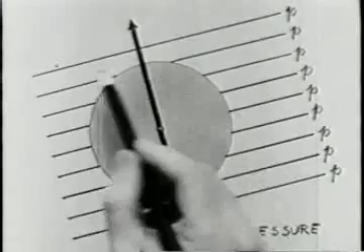To think about this physically, let this be a small fluid particle, and let these be the lines of constant pressure in its neighborhood. The pressure forces acting parallel to these lines exactly cancel each other, and so the net pressure force must be perpendicular, passing through the geometric center.

Now let these be the lines of constant density in the fluid particle. If the density lines are parallel to the pressure lines, we call this a barotropic situation, the center of gravity of the fluid particle must lie on the line of the pressure force, so the pressure force produces no torque about the center of gravity.

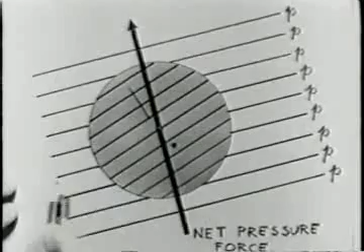But now suppose that these lines are tilted. So, then the center of gravity of the particle lies on this diameter, and if the density is variable, the center of gravity will no longer lie on the line of the net pressure force, so that this force may produce a torque about the center of gravity, and in that way change the circulation.

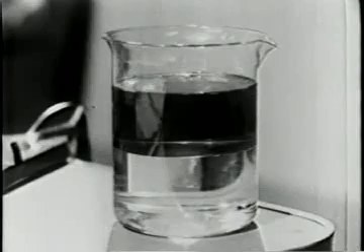In a fluid at rest, the lines of constant pressure are horizontal. Since the circulation is forever zero, the lines of constant density must coincide with the lines of constant pressure. That is why the interface and the free surface are also horizontal.

If we tilt the interface, it does not remain tilted, as it does in this photographic illusion. The constant pressure lines and constant density lines are now misaligned, and the pressure forces in Kelvin's theorem create a circulation which rectifies the situation.

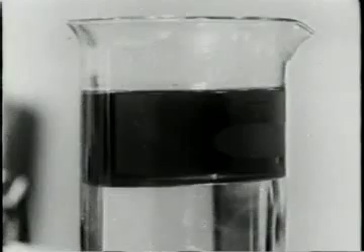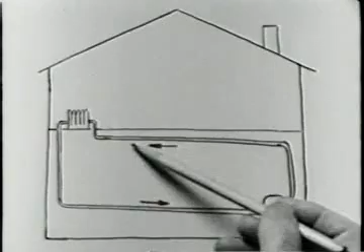The circulations in natural convection systems are driven by the pressure forces in Kelvin's theorem. One example is the hot water heating system of a house. Another is the principal circulation of the Earth's atmosphere between the cold regions at the poles and the hot regions at the equator.

Kelvin's theorem also shows us how irrotational flows may arise. Suppose that you have a motion which begins from rest. If there's no motion, there's no vorticity, and if there's no vorticity, there's no circulation.

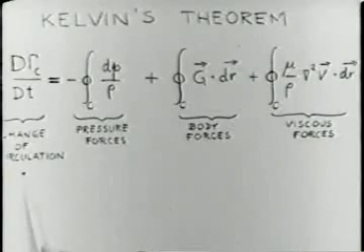Suppose, too, that the fluid is barotropic, and that the body forces are conservative, and that viscous forces are negligible. Then the circulation will forever remain zero, and so the vorticity will forever remain zero. The resulting flow is therefore irrotational.

Suppose, for example, that an airfoil begins at rest and moves through the fluid. Circulation on all fluid elements is zero to begin with and remains zero, so that the flow remains irrotational everywhere, except in the thin viscous boundary layers where vorticity is produced by viscosity.

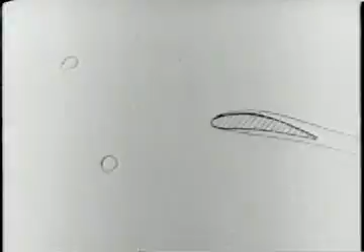It is a curious fact that viscosity helps generate lift on an airfoil. Here is an airfoil at rest, with no circulation anywhere. When it begins to move, viscous effects near the trailing edge result in the shedding of a vortex, and thus to a circulation on this curve.

But the fluid along this larger curve has not experienced viscous forces, and Kelvin's theorem tells us that the circulation on this curve must be zero. This requires, though, that there be along this other curve surrounding the airfoil a circulation equal and opposite to that on the curve surrounding the vortex.

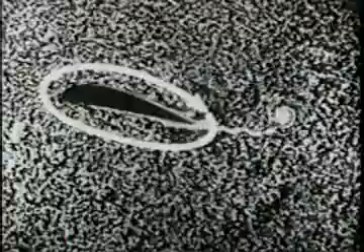This circulation around the airfoil, which may be ascribed to a fictitious vortex bound in the airfoil, is necessary for the production of lift. Now, when the airfoil stops, the bound vortex is shed as a stopping vortex, again because of viscous forces at the sharp trailing edge.

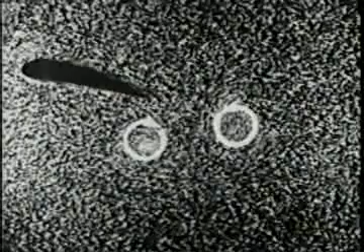On a circuit around either vortex, viscosity has acted and circulation is present. But on a circuit enclosing both vortices and passing through fluid on which friction has never acted, the circulation remains zero. Thus, the equal and opposite vortices produce zero net flux of vorticity through the entire bounded area.

When all the torque-producing factors in Kelvin's theorem are absent, fluid dynamics can be given a beautiful geometrical interpretation in terms of Helmholtz's vortex laws. First, vortex lines never end. They form closed loops, and the circulation is the same along the length of the loop.

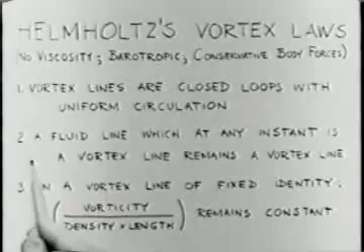Second, a fluid line which at one instant of time is a vortex line will forever after remain a vortex line. Third, on a vortex line of fixed identity, the ratio of the vorticity to the fluid density and the length of the line remains constant as time proceeds.

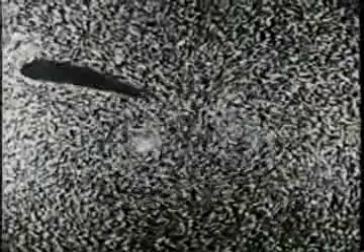We can illustrate these laws by some experiments. Here are two vortices of equal and opposite strength. They move downwards together. The induced velocity of A moves downward the fluid at B, and vice versa. Each vortex core is convected with the fluid to which it is frozen.

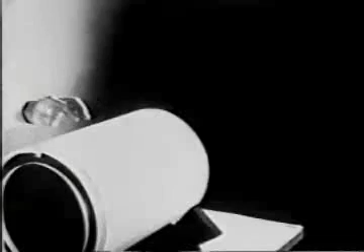Smoke rings also illustrate the vortex laws. You've never seen a smoke ring which is broken somewhere, nor will you ever see one, because vortex lines can never end. The fact that the smoke ring propels itself shows that the vorticity is locked in the fluid, for each element of fluid is propelled forward by the induced velocity of all the other elements of the vortex, and so the whole vortex is convected by itself.

The smoke, which after all marks the fluid, is carried with the vortex, again showing that the vorticity is frozen in the fluid. So, as you see, old vortices never die. They only fade away through viscosity.

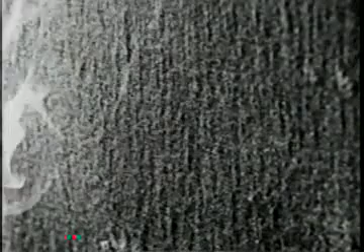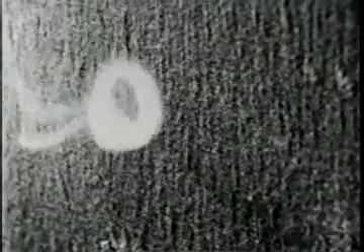As a vortex ring approaches the wall, it spreads out and slows down. This may be explained in terms of the induced velocity field of the fictitious image vortex on the other side of the wall, which in effect takes the place of the wall itself.

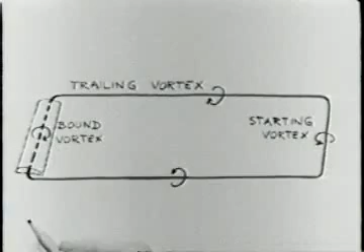This sketch shows the vortex system for a wing of finite span. The circulation that is required for producing lift is created by a vortex bound in the wing. But this bound vortex cannot simply end at the wing tips. The vortex loop is closed by trailing vortices and a starting vortex which is left at the airport.

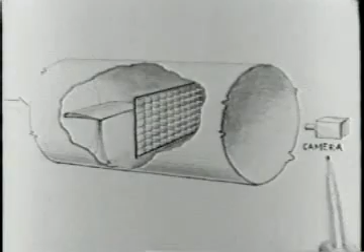We can make the trailing vortices visible in this apparatus. The camera looks upstream at the trailing edge of the wing. Behind the wing is placed a fine wire grid on which are mounted wool tufts. These wool tufts line themselves up with the flow. The angle of attack of the wing is being increased, and the tip vortices grow in strength as the lift, the circulation, and the strength of the bound vortex also increase.

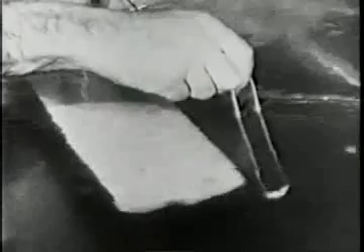This little vorticity meter shows streamwise vorticity if it is aligned with the flow. It is not a propeller because it turns only if the flow is spinning. If we put it behind a wing, right behind the tip it spins fast. Slightly inboard or outboard, it hardly turns. The trailing vortex is strongly concentrated at the wing tip.

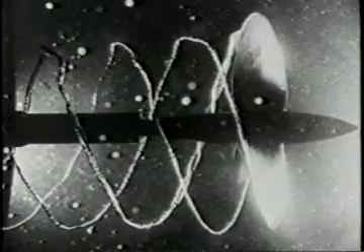The concentration of the trailing vorticity in strong tip vortices results in very low pressures in the centers of these vortices. When this occurs strongly enough in marine propellers, the water in the vortex cores boils and makes the trailing vortices from the blades easily visible.

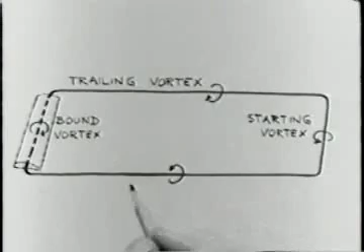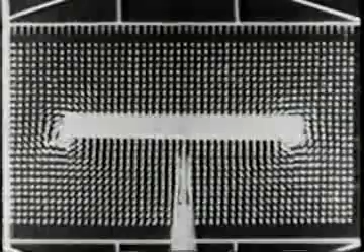Looking at the induced velocity field of the vortex loop, you can see that there are downwash velocities within the enclosed region. These downwash velocities, which you can see in the tuft pattern behind the wing, act at the wing itself. They make the wing appear to be flying through air which is itself descending, and this results in what is called induced drag. The work of the forward-moving wing, as it moves against this induced drag force, accounts for the kinetic energy being stored in the constantly lengthening trailing vortices.

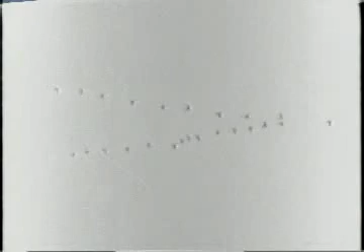Have you ever wondered why migrating birds fly in formation? One explanation, a plausible one, is that each bird takes best advantage of the upwash velocities and the trailing vortex systems of the ones forward of it. So each bird behind the leader flies on an ascending air current.

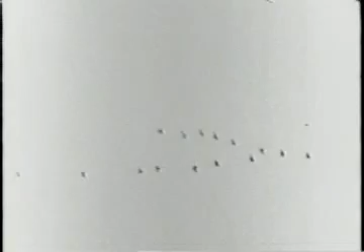You should keep in mind that the vortex laws come from the ordinary dynamical equations of motion. So anything you learn from the vortex laws can also be found by thinking about the pressure field. With the lifting wing, for example, air can leak around the tip from the high pressure region to the low pressure region. This leakage produces a transverse flow which accounts for the tip vortex.

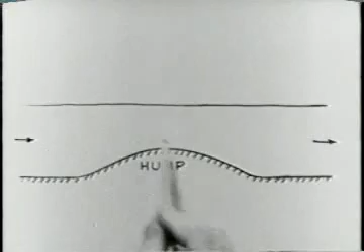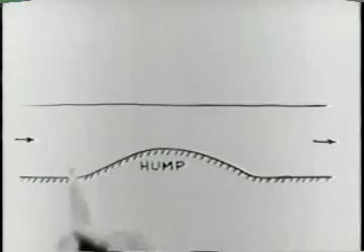To show the effect of stretching vortex lines, we have an apparatus in which water flows over a hump. The water depth first decreases and then increases. The speed of the water is inversely proportional to the depth, and so the flow accelerates as it goes up the hump and then decelerates as it goes down the hump.

Now I'm making a vortex with a sharp-edged plate. This vortex has its axis vertical. As it goes up the hump, the length of the vertical vortex line decreases, and so the vorticity decreases, as you can see by the spin.

When the vortex line goes down the hump, the length of the line increases, and the rate of spin also increases. The effect going down the hump, however, is not as strong as the effect going up the hump. That is because viscosity is always acting to decrease the rate of spin of the ping-pong ball.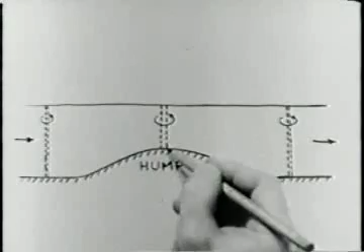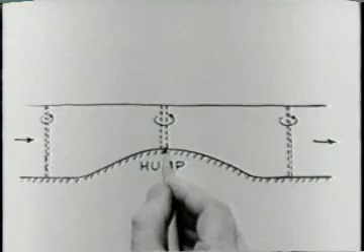When a vertical thread of fluid moves up the hump, its length decreases, but the volume of the thread remains the same, and so its diameter must increase. This also increases the radius of gyration. To conserve the moment of momentum, the rate of spin must decrease.

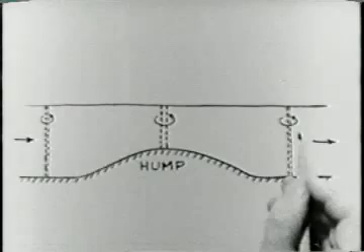Now, when the vertical thread of fluid goes down the hump, it stretches and becomes thinner. Therefore, the rate of spin must now increase. A figure skater does the same thing. She speeds up by decreasing her moment of inertia.

Turbulent flows are full of vorticity. The vortex lines are like tangled spaghetti. The mutually induced velocities of these vortex lines cause some of them to lengthen, and this lengthening produces a finer grained turbulence with higher velocity gradients. This makes for added viscous dissipation. Big whirls make little whirls, which feed on their velocity. Little whirls make lesser whirls, and so on to viscosity.

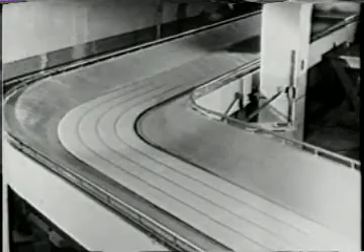In this open channel, water flows around a bend. Upstream, the flow is parallel to the walls of the channel. Because of the boundary layer on the bottom of the channel, the upstream flow has a horizontal component of vorticity in a direction transverse to the flow. But upstream, there is no vorticity component in the vertical direction, nor in the streamwise direction.

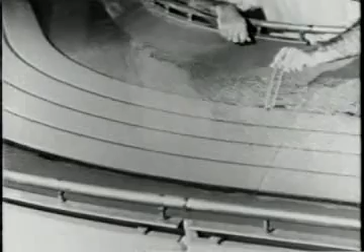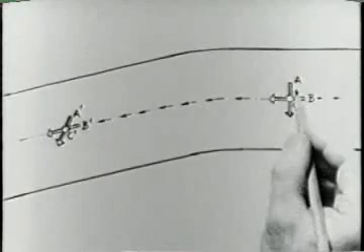Now I am putting in the little streamwise vorticity meter at the end of the bend. Somehow, a streamwise component of vorticity has been generated in the bend. To see why, let's look at three perpendicular fluid lines, A, B, and C, in the upstream position. If we neglect viscous forces compared with inertial forces in the bend, we may imagine the vortex lines to be frozen to these three fluid lines.

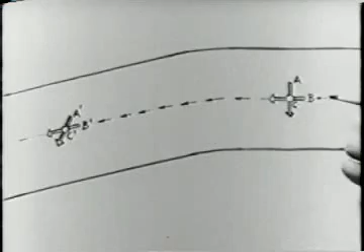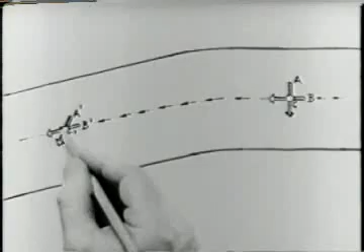Notice, though, that there is no vertical component of vorticity C, nor any streamwise component of vorticity B. There is only a transverse component of vorticity A, associated with the viscous boundary layer on the floor of the channel. Now line C moves along the center streamline to position C prime, so there is no vertical component of vorticity, C prime. The streamwise component of vorticity is connected with the turning of the lines A and B.

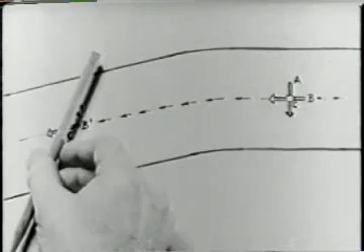Line B follows its streamline and therefore rotates in a counterclockwise sense. Since the vertical vorticity remains 0, line A must rotate clockwise by an equal amount. This clockwise turning of line A into position A prime requires that the velocity at the inside of the bend be greater than the velocity at the outside.

The important point is that the vortex line A prime now has two components. One component transverse to the flow, which we had before, and a new component along the flow, which we did not have before. This new component, which is called the secondary vorticity, is what causes the water at the surface to move from the inside toward the outside of the bend. And these heavy oil droplets, which move along the floor, show that the flow on the bottom moves toward the inside of the bend.

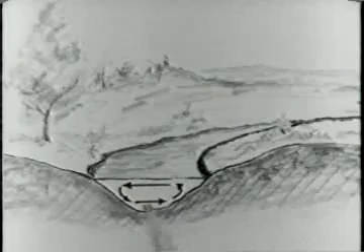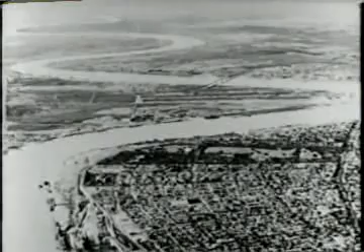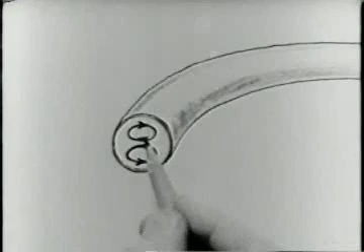Such secondary flows often occur when a channel is curved. When a river goes round a bend, the secondary flow erodes the outer bank and deposits sand and pebbles on the inner bank. This tends to make the bend get more bendy. Some people think that this is one of the mechanisms by which exaggerated cases of meandering occur. When a pipe is curved, there are two cells of secondary flow. These secondary flows carry high-energy fluid from the middle of the pipe to the walls, in this way increasing the frictional losses.

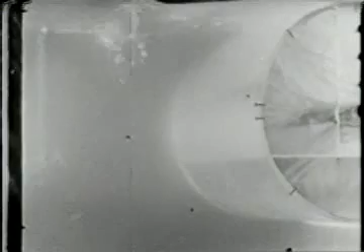The vortex laws are also illustrated by the flow in this long channel as it goes under a circular cylinder. Strong vortices are developed from the vorticity present in the viscous boundary layers on the two side walls. Suppose that this thread of fluid coincides with one of the vertical vortex lines. As it moves downstream, it is both bent and stretched. The stretching of the vortex line intensifies the vorticity and makes the vortex core visible. The bending of the line produces a streamwise component of vorticity because the vorticity is locked in the fluid.

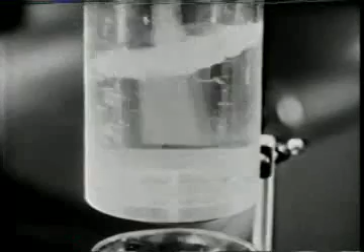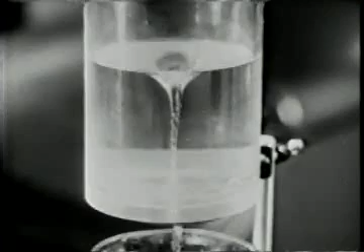I'm going to make some vertical vorticity in this jar. Now, out with a plug. See how quickly the strong vortex forms. This thread of fluid is also a vortex line. When the flow begins, the thread is enormously lengthened, and the vorticity increases proportionately. A similar mechanism underlies the formation of tornadoes.

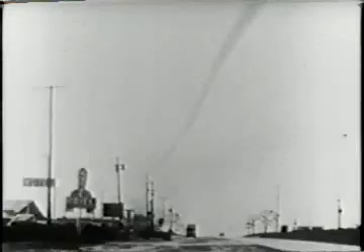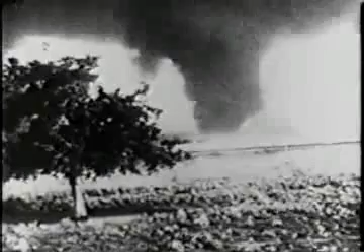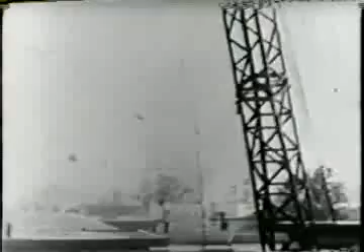You can see the vortex core of this tornado by the dust in the updraft. Notice also the air flowing inwards and feeding the vortex. The centrifugal pressure field of the vortex creates such a very low pressure at its center that houses over which the eye of the tornado passes literally explode. Watch the house in the lower left-hand corner.

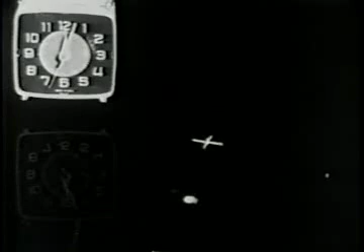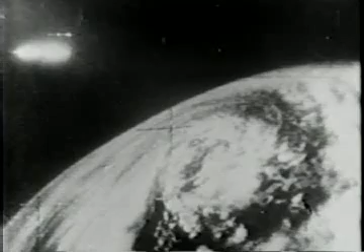In our large tank, before we started the flow, the fluid had a very small vorticity in inertial space due to the turning of the Earth. When the plug was pulled, the vertical fluid thread on the axis was enormously lengthened, and the vorticity in inertial space was strengthened proportionately, finally to the point where we could see it in the reference frame of the Earth. These photographs of the Earth's cloud cover, taken from the satellite Tiros, show that similar events occur in the Earth's atmosphere on a grand scale.